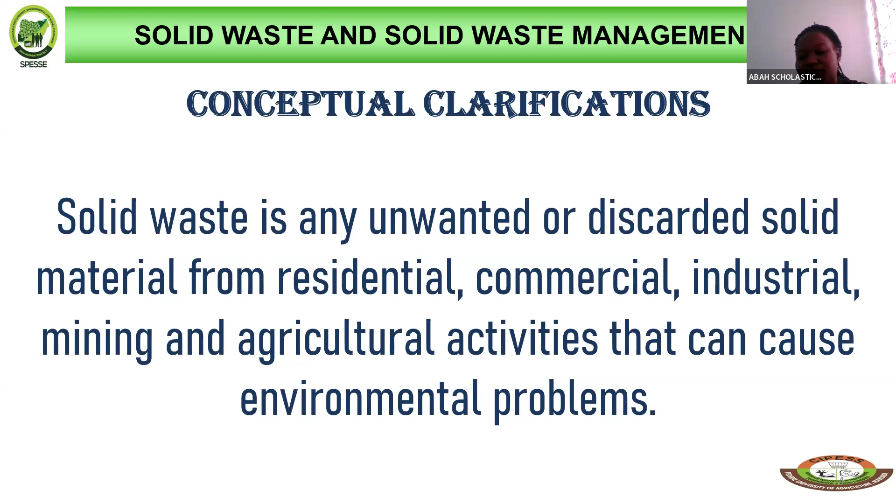Now, the next slide takes us to solid waste and solid waste management, conceptual clarifications. This will help us understand what solid waste management means. So from the slide presented, solid waste management comprises purposeful and systematic control of waste at various stages of generation, collection, transportation, recovery, processing, and disposal of solid waste.

For some of us, this definition or the terms used here are new. That's why I'm taking my time to explain this for us, so that in the course of our reading, it will be easy to understand. So the purposeful and systematic control of waste at various stages of generation has to do with what?

Solid waste management has to do with organized handling of waste. If waste is not generated, can we collect such waste? The answer is no. That is why solid waste management starts at the stage of generation. Generation of waste, as far as we are concerned, is inevitable - at every point in time of our life, we tend to generate waste.

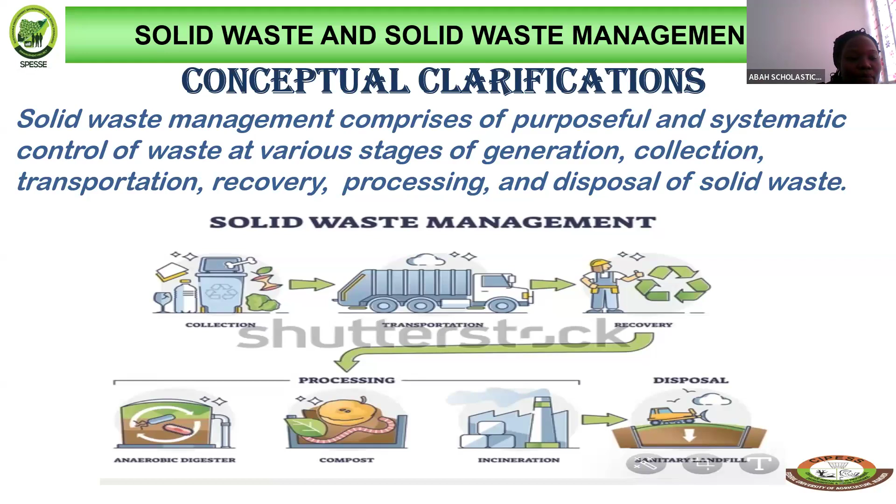The next slide presents solid waste sources or classification based on origin and management.

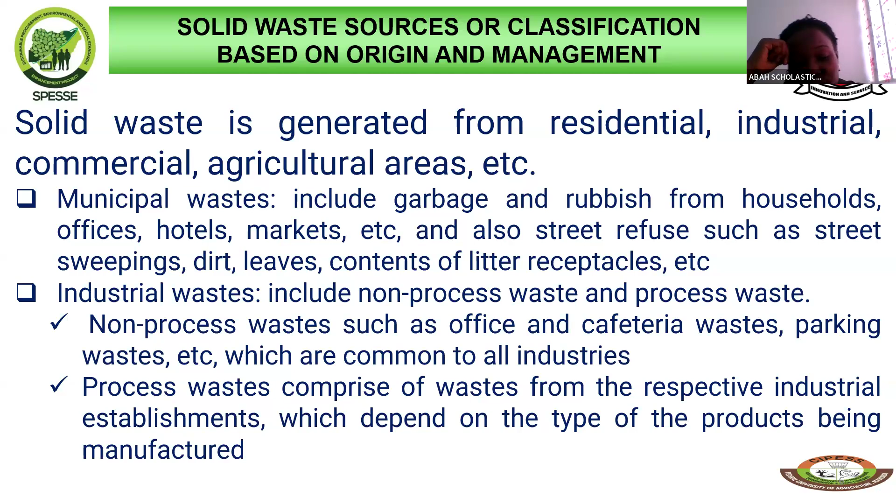We can also recycle some of this waste, so as to get useful or recover useful products from it. So for non-processed waste, they can be recycled. Now let's look at the characteristics of municipal waste.

Characteristics of municipal waste. We have mentioned what municipal waste are: waste from our residential areas, offices, markets, and what have you. Now, what are the major characteristics of this municipal waste?

When we talk about characteristics, we are talking about the special features that tell us these are waste. What are the qualities, the properties that describe something and make that thing identifiable or distinguishable from others?

We'll be looking at some of the characteristics, like the physical characteristics, the chemical characteristics, and the biological characteristics. We'll also look at the various examples involved and the definitions or meaning of those examples.

So for the physical characteristics, they include the specific weight, the moisture content, the particle size and the size distribution, and the permeability of the compacted waste.

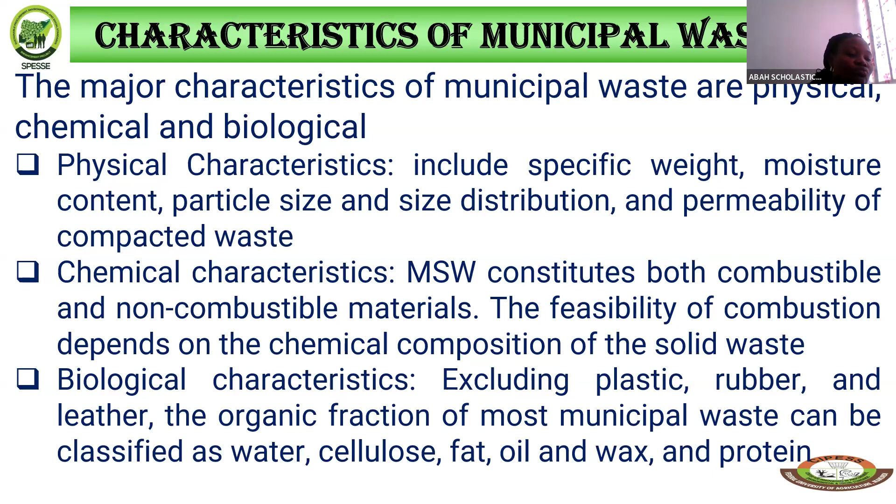Our next slide shows basic general principles and criteria for municipal solid waste strategy, and this is for sustainable development. But before then, let's know what sustainable development means: it simply means meeting present needs without compromising the ability of future generations to meet their own needs - using resources now without jeopardizing the resources future generations need to meet their needs.

The basic principles or criteria for municipal solid waste management strategy - there are 4 principles here: the prevention principle, the precautionary principle, the polluter's pay principle (also known as producer's responsibility), and the principle of proximity and self-sufficiency.

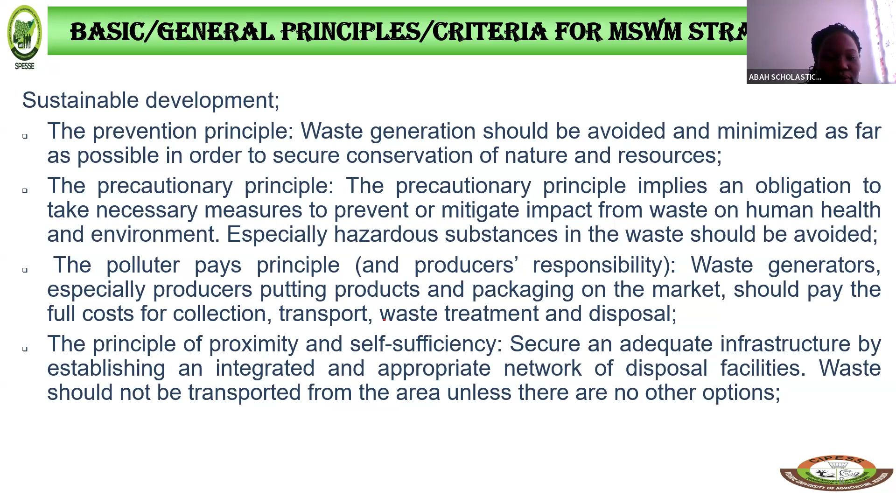And then it also reduces carbon emission. The fact that the waste is treated close to where it is being generated reduces the carbon emission and also prevents illegal dumping. I think that is it about the sustainable development.

So the next slide talks about the waste hierarchy, the basic general principles. Of course, we are still talking about waste management. We said that in managing our waste that is being generated, we are talking about how to manage this waste from the point of generation to the final word, disposal. Now, this management is not just about generating the waste and final disposal. There are step-by-step processes that lead to final disposal that help us manage this waste. Our main priority while we manage this is not just managing waste because we want to manage waste. We are managing the waste because we want our environment to be protected, and also for sustainable development.

So in managing this waste, we follow what we call the waste hierarchy. This tells us the step-by-step process of managing our waste from the point of generation to the point where this waste is dumped. Of course, we know that the first step is to avoid. This hierarchy tells us that this step-by-step process is followed in order of priority. Avoiding waste creation is the best, because when we avoid waste creation, it reduces the amount of waste that is generated.

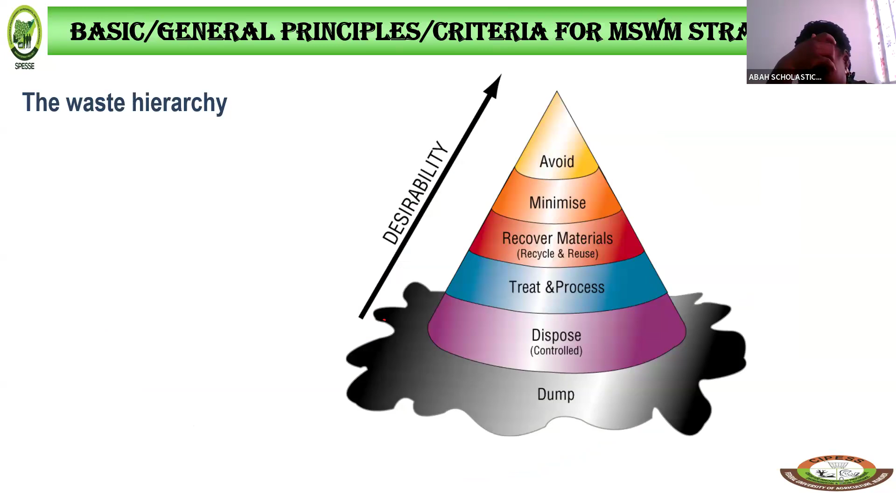This is more advanced in the sense that the waste management hierarchy only spoke about how wastes are avoided, how they are minimized, the recovery of materials through the processes used to recover these materials from waste, how they are treated, the process, and disposal.

But in this aspect, the stakeholders—all those that generate waste and are affected by this generation of waste—are brought into consideration. They have their role to play in management of waste, and the waste system elements are also put in use to manage waste. The last aspect is sustainability, which includes technical and other factors, and this helps us achieve long-term environmental protection.

So it is not just collection and disposal; it also integrates various aspects such as the technical systems, the people (that's the stakeholders), the financial and legal systems, and also environmental sustainability.

Now let's look at the stakeholders. These show the different actors involved in waste management: the local authorities and the NGOs. The local authorities are responsible for regulation and service delivery. All of them have their roles, as I have mentioned.

The NGOs and CBOs handle community awareness and support. The service users are the households and the businesses, and so on.

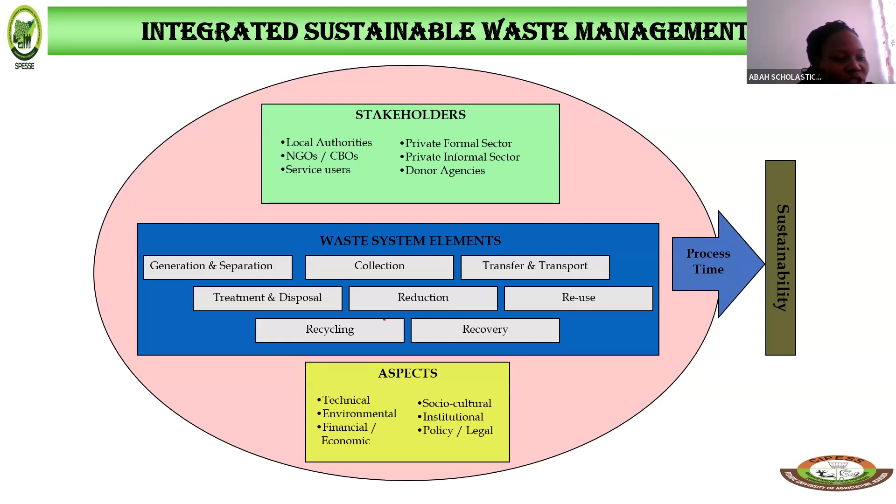So let's go to the institutional framework. The municipal solid waste management will always remain a responsibility of the public authorities. From our previous slides where we talked about the stakeholders, there are various actors. These actors are the stakeholders. Stakeholders are the people that determine how this waste is being handled.

I said that even though municipal solid waste management remains a major responsibility of the public authorities, it is critical to rationalize these responsibilities, that institutions must have autonomy and authority, and they must be accountable for service performance.

Now let me summarize what this slide is talking about. Municipal solid waste is ultimately the responsibility of the government, we all know. This government can be local government, state government, or federal government. Even companies that collect waste, these private companies, there are private companies that also collect waste, and of course those are the stakeholders.

Even if private companies collect waste, of course those companies must have the license. The NGOs are also involved, we made mention of the NGOs and the CBOs. Even though they are involved, government is still accountable. And waste management, which we know is a public service, government cannot completely avoid it.

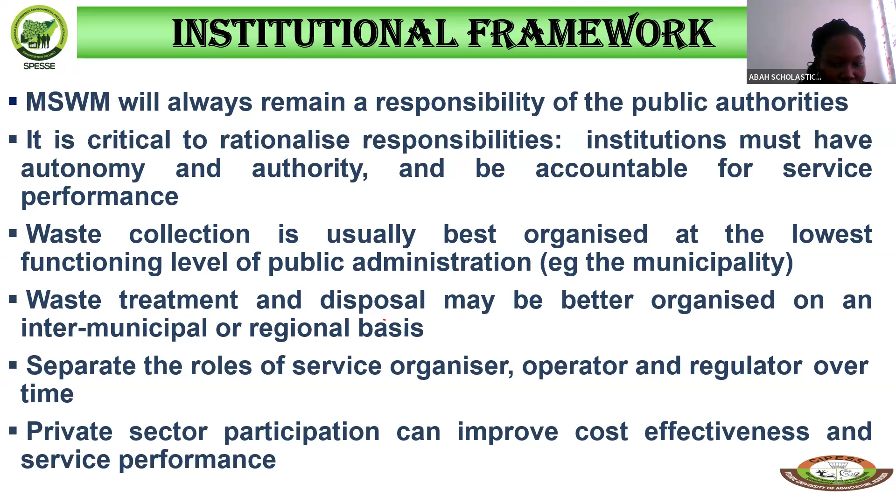So, and of course, you know that, let's check the next slide.

Now the next slide tells us the functional elements of solid waste management, the activities associated with the management of solid waste. Please class, I think for those joining lately, this material is almost like talking about the same thing over and over again, right?

Please class, are we together? Yes ma'am, with you. I hope I'm not the only one doing the talking. No, we are here, I'm not talking to myself, right? No, you are not talking to yourself, we can hear you, understanding ma'am? Are we understanding? Yes. Okay, is the course interesting? Yes ma'am, very interesting. Okay, that's very good, I'm happy to hear this. So we can see that it's an A course, right?

Yes ma'am, because at this point this slide is talking about functional elements of solid waste management and strategy, and we have spoken about this before. It's just like a repetition, and it helps us understand what we are talking about. You see that these basic terms are interlinked.

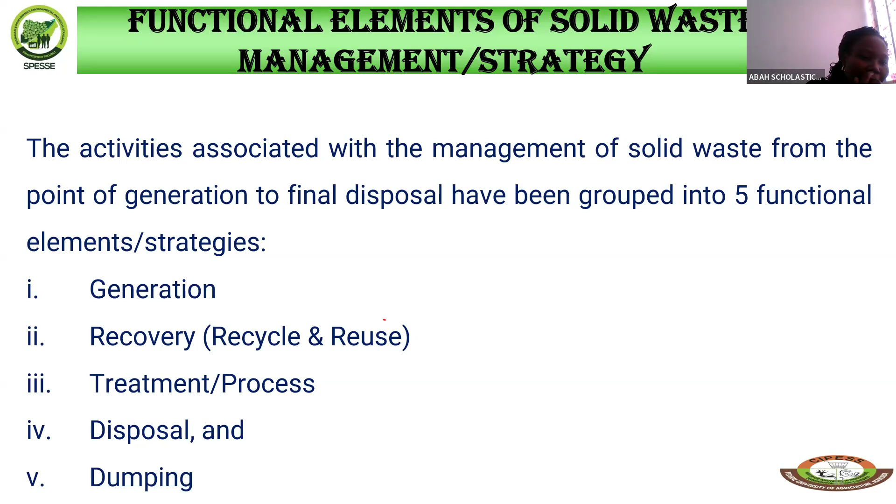So what does it mean? Okay, now for instance, let's look at waste management.

Management, as we know, involves the reduction in the volume of waste. How can we reduce the volume of waste? Through avoidance and minimization of its generation.

Avoidance is the most desirable as it ensures that our material resources are completely utilized, which means that once we avoid waste, little or no waste is generated.

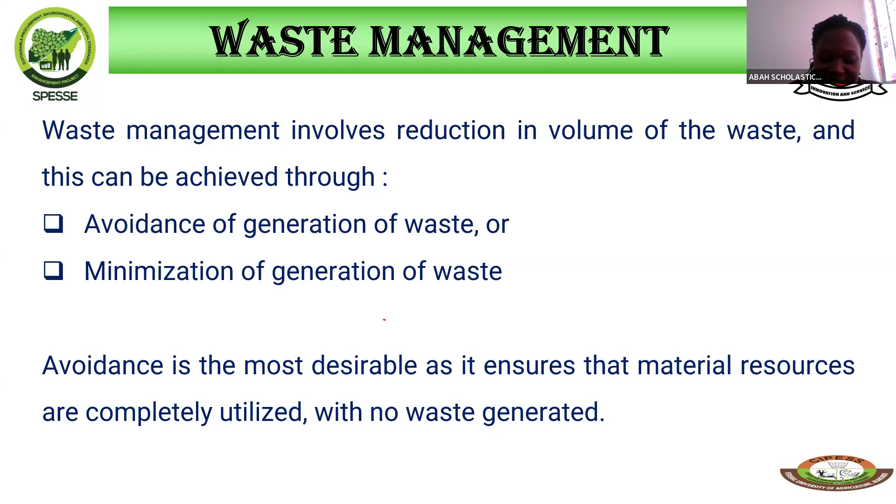Waste minimization is not a technology, and as such there are ways it can be achieved. One way is source reduction, that's prevention—this is waste avoidance, where we try as much as possible to avoid the amount of waste generated at source.

Another way is to reuse products. Some waste products are being reused and become useful products to us. I've mentioned tires that were thrown away and are being reused, and even bottled water containers that have been thrown away and are reused to put things inside for sale, like Zobo drinks.

Then there's remanufacturing, recovering for recycling, and composting, but not by treatment. So we recover waste through recycling, remanufacturing, and composting. Waste management can be achieved by all these processes.

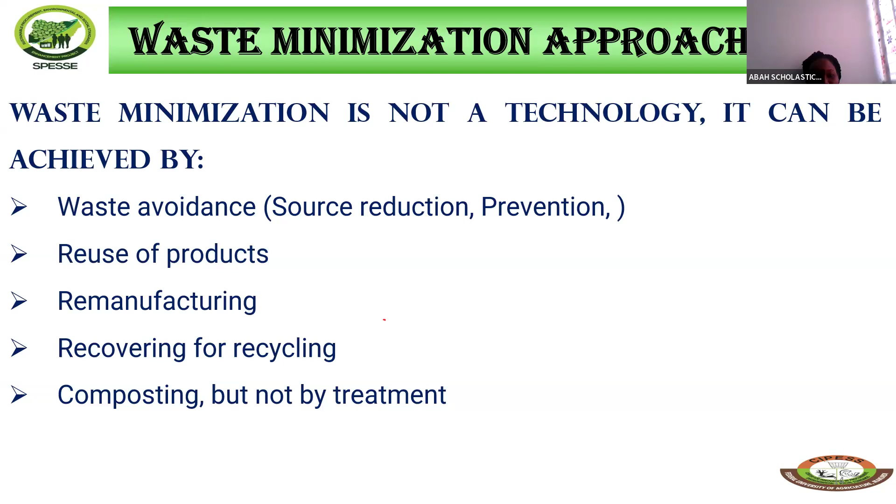So we have made a summary of this waste minimization approach, just explaining what we have mentioned. I'm not going to talk much since we have limited time, but as we go along the slides, at your leisure time when reading, you'll be able to understand. Let's look at what the slides are talking about.

Waste minimization includes source reduction practices that reduce or eliminate waste generation at the source, and environmentally sound recycling practices where source reduction is not economically practical. Source reduction includes any practice that reduces the quantity of waste.

Whatever we are doing, let's take for instance—it is better to buy food in bulk than in smaller quantities. Of course, all fingers are not equal, but one thing for us is to plan our lives. If we are buoyant enough, it's better to buy even half a bag of rice, or even a full bag, and keep it in store, rather than going to the market and buying one mudu every week.

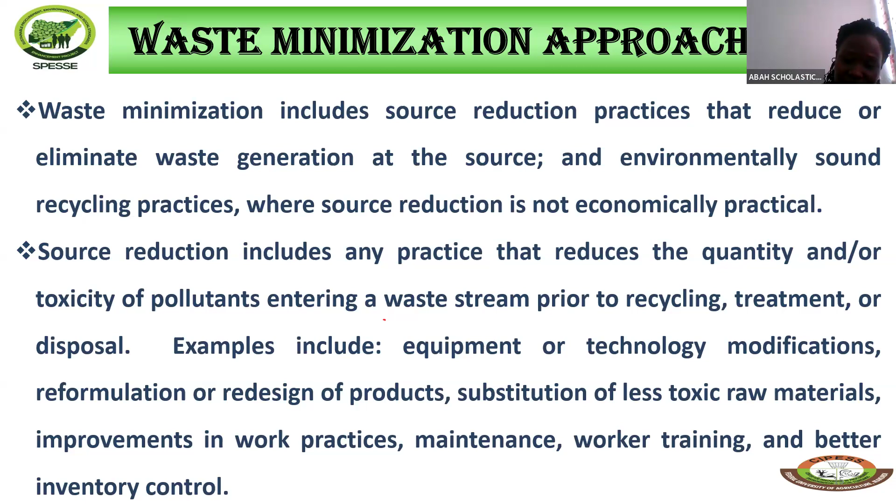Examples of how we can minimize waste at source: using technology modifications, redesigning of products, substitution of less toxic raw materials, improvement in work practices, maintenance, worker training, and better inventory control.

Another approach is the reusing of items. We reuse items by repairing them, by donating them to charity and community groups, and by selling them to reduce waste.

It is expected of us to use a product more than once, just like the bako bag we use at the market, either for the same purpose or for different purposes. Reusing, when possible, is preferable to recycling, because the item does not need to be reprocessed before it can be used again. You can't compare reusing a product and recycling it. The stress to even recycle a product can discourage a lot of people.

But in a situation where the product is still intact and can be reused, you just go ahead and reuse it. That process helps to minimize the amount of waste that is generated.

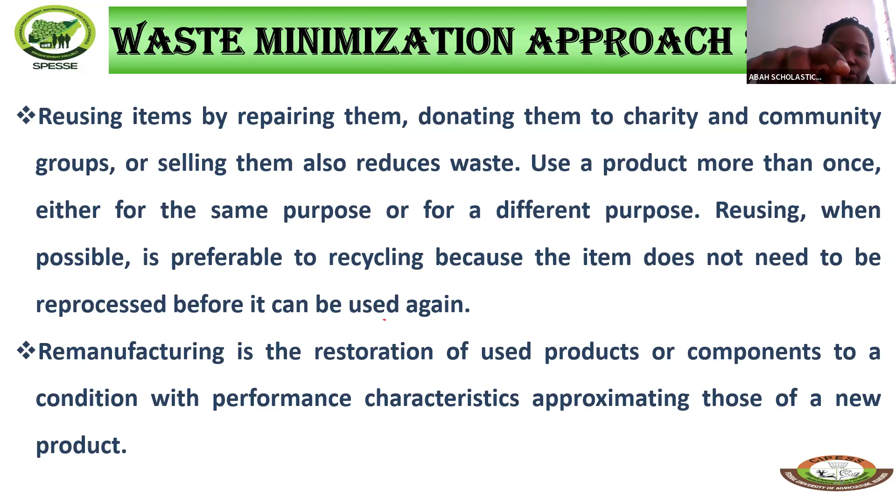Remanufacturing is the restoration of used products or components to a condition with performance characteristics approximating those of a new product. So remanufacturing is also a way of waste minimization.

Now there are certain things we have to know about waste minimization. Recycling or reclamation of waste means a material is reclaimed if it is processed to recover a useful product, or if it is regenerated. That is what recycling means, that is what reclamation means.

If you have the choice, buy recycled goods. It is better to recycle our goods instead of buying new ones.

Composting is another form of recycling, where our organic waste is converted into organic manure that can be used on the farm.

Composting is a controlled biological decomposition of organic matter, such as food and yard waste, into humus, a soil-like material. Composting is nature's way of recycling organic waste into new soil, used in vegetable and flower gardens, landscaping, and many other applications.

So we can also reduce our waste by turning some of it into compost manure that can be used on our farms, through the process of composting. By doing so, we have tried to reduce the amount of waste that was generated.

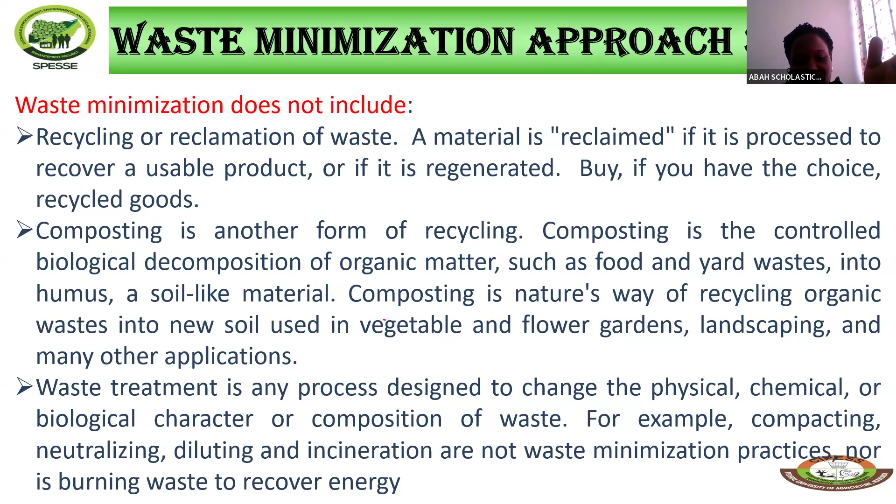They are not waste minimization practices, nor is burning waste to recover energy. Waste treatment is also a process that is designed - we know what waste process is. So all these others mentioned, compacting, neutralizing, diluting, incineration, they are actually not waste minimization practices. This is waste to energy, because from compacting, neutralizing, all these ones, they release energy that are used by industries.

Then what are the advantages of the waste minimization approach? Waste avoidance, as we all know, has the highest rank in the hierarchy of integrated solid waste management, because for every ton avoided, there is a ton less that needs to be managed. If we refuse to generate waste at source, it means for every ton of waste not generated, that ton will not be managed. So it is very important to always manage waste at source, by avoiding the way waste is being generated.

Minimization plays a critical role in reducing waste quantities by reducing the financial and environmental burden of municipal solid waste management. That is why they say charity begins from home. Generation of waste at source starts with us, with all those municipal solid wastes that are being generated. When we are conscious of the way we generate waste, the government does not have to labor much - that financial and environmental burden of managing solid waste will be reduced on the government, and it will lead to a sustainable environment. Minimization will become even more critical as the quantity of waste, in particular consumer packaging, increases.

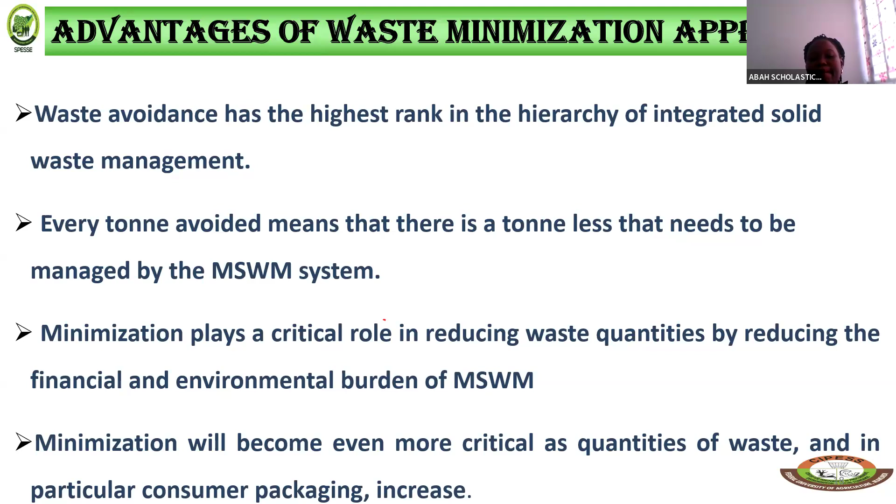Let's look at the advantages of waste minimization. Because of its obvious advantages, waste minimization has a number of implications for general waste management. The first is it should be a central waste management priority. Why? Waste generation is a function - high levels of waste generation occur when high levels of financial resources are spent.

Yes, especially if rural is turning to urban. Of course, rural waste is mostly organic waste. Where rural is turning to urban, there will be more consumption, more packaging materials. So minimizing waste generation depends on introducing economics that reflect waste management costs and accountabilities that assign responsibility to those who generate it. When responsibilities are assigned to those who generate it, at least they'll be conscious of the kind of waste they generate.

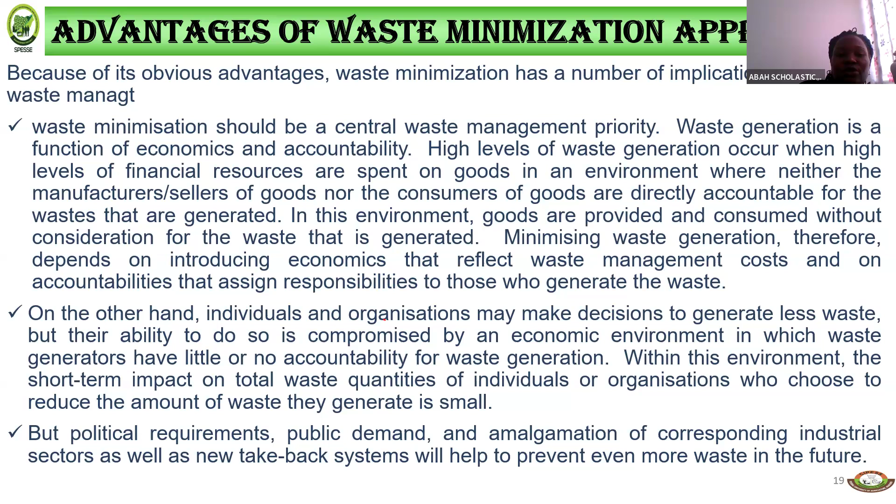On the other hand, individuals and organizations make decisions to generate less waste, but the ability to do so is compromised by an economic environment in which waste generators have little or no accountability for waste generation. So within this environment, the short-term impact on total waste quantities of individuals or organizations who choose to reduce the amount of waste generated is small. So these are the advantages of waste minimization.

So let's go to source reduction. Source reduction is waste prevention, and it includes many actions that reduce the overall amount of waste. Waste avoidance by reusing a product when possible is preferable to recycling - using a product more than once. Refilling bottles, I've mentioned - I will not waste time on this again because we've discussed it already. Using each side of a paper.

Yes, in a business center for instance, like handouts, student handouts - you will notice that they try to photocopy on each side of the paper. But in order to reduce the quantity of paper used, it is better to use both sides of the paper sheet for photocopying. That way, instead of a document needing 10 papers because you're photocopying on one side, if you do both sides, it will be reduced by half, that is 5. So that is a way of reducing, or saving money - a way of reducing waste at source.

Also, reconsider your daily routines and habits. Whatever we are doing in our daily routine, we should make sure that the best option we choose at the end of the day will help us reduce waste at source. Reconsider repairing before throwing.

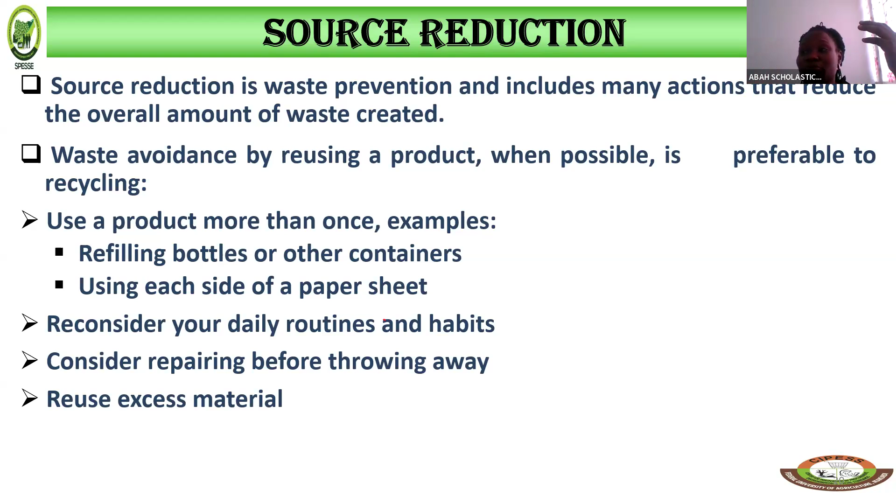Whatever you are having, even though you have enough money, even though you are buoyant enough, instead of throwing away what you have when it can be repaired, it is better to repair it than to just throw it away. And if you don't want to repair it, give it to somebody that wants it, then reuse any excess material. If you have excess material, you want to reuse it.

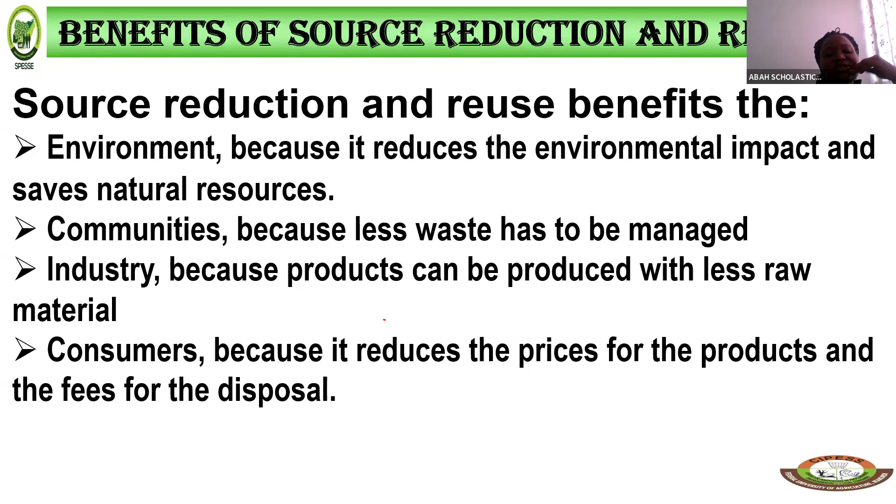So the benefits of source reduction are source reduction and reuse. It is important to reduce environmental impact and saves natural resources for communities, because less waste has to be managed. It is important for industry because products can be produced with less raw materials, and it reduces the prices for the products and the fees for disposal.

Source reduction has a number of implications for waste. Simply put, source reduction is waste prevention. Like I said, this is what we have discussed, but let's go further to be able to understand more. It includes many actions that reduce the overall amount and toxicity of waste created. Source reduction can conserve resources, reduce pollution, and help cut waste disposal and handling costs.

You see the importance of source reduction, right? It avoids the cost of recycling. Of course, if waste is not generated at source, the amount of waste that will be recycled will be reduced, which means it will avoid the cost of recycling. The amount of waste that will be composted, landfilled, and combusted will reduce drastically. So it avoids cost for us.

Source reduction is a basic solution to the garbage glut. Less waste means less of a waste problem, because source reduction prevents the generation of waste in the first place. So it comes before the management options that deal with waste after it is already generated. And after source reduction, recycling and composting are the preferred waste management options, because they reduce the amount of waste going to landfills and conserve resources.

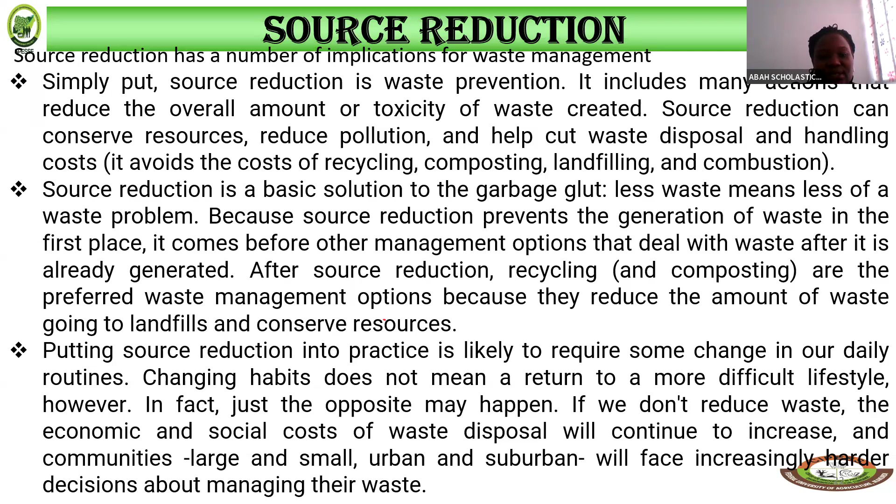In fact, the cost of waste disposal will continue to increase. The more waste that is generated, the more the economic and social cost of waste disposal will increase. And communities, more urban and suburban, face increasingly harder decisions about managing their waste. So that is all about source reduction.

Now we are talking about recycling. When we talk about recycling, it involves the separation and gathering of waste materials, preparation of these materials for reuse, processing, and manufacture at the manufacturing recycling facility. So there is a facility where waste meant to be recycled is taken.

So before we recycle waste, especially when separation of waste was not done at source, there is need for separating and gathering these waste materials before they are recycled. So reuse, reprocessing, and remanufacturing of these materials by industry is important. It is an important factor to reduce use of natural resources and the amount of waste requiring disposal by landfilling.

What are the advantages of recycling? Recycling falls within the second highest rank in the hierarchy of integrated solid waste management, because every ton that is extracted from the waste stream means that there is a ton less that needs to be managed. We have mentioned that before, right? So recycling therefore plays a critical role in reducing waste quantities, returning resources back to use.

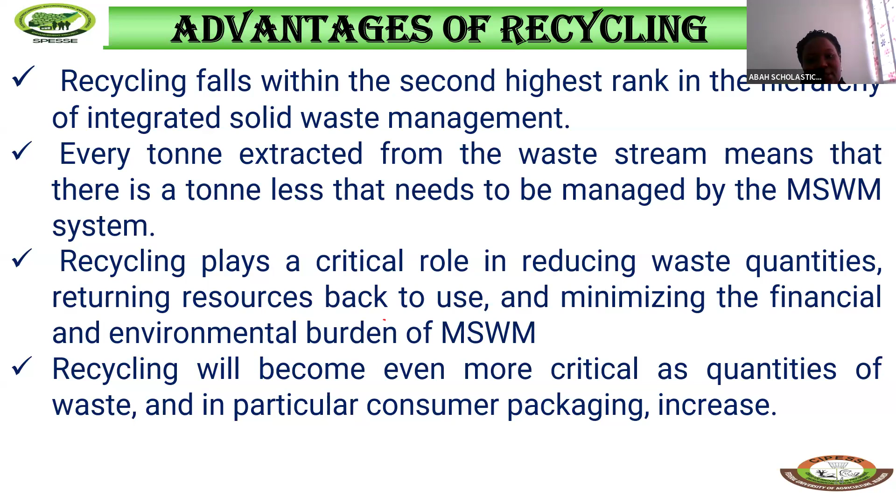I think this is the last slide we'll treat for today. Tomorrow when we come, we'll complete the other part of the slide, after which my colleague will take over the remaining days.

So the recycling cycle is a closed cycle management of substances. The recycling cycle is as follows: prime material simply means raw material that has not been processed before. We use raw materials for our production, and they are being utilized. When we utilize them, it becomes a used product.

Some of the products we discard as waste, and there's need to recycle some products, and the cycle continues. We have the prime material that has been recycled to production, and from production they are utilized by consumers. The products utilized by consumers become used products. These used products can be regarded as waste, and some can be recycled, and the cycle continues.

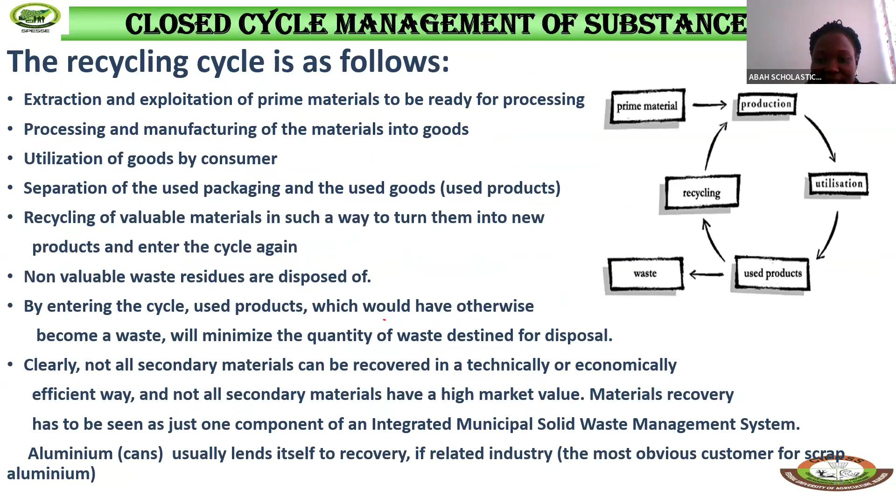So we have just 2 minutes left. In our next class, we'll be talking about the recyclable materials. So we've spoken about recycling, we went ahead to talk about advantages of recycling, and now the closed cycle management of substances, how this recycling process is done. Tomorrow, by the special grace of God, we'll be talking about the recyclable materials.

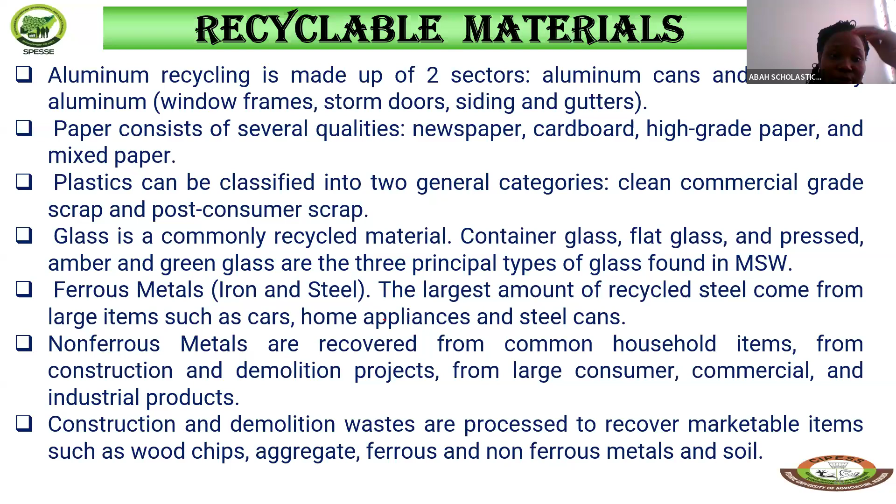There are different materials that can be recycled, and each of these materials are grouped into sectors, grouped into types. We have made mention of the facility where our recyclables, those materials that can be recycled and remanufactured, are taken - the manufacturing recycling facility, where separation and gathering of these waste materials are done before the recycling can take place. So I think for now this will bring us to the end of today's lecture.